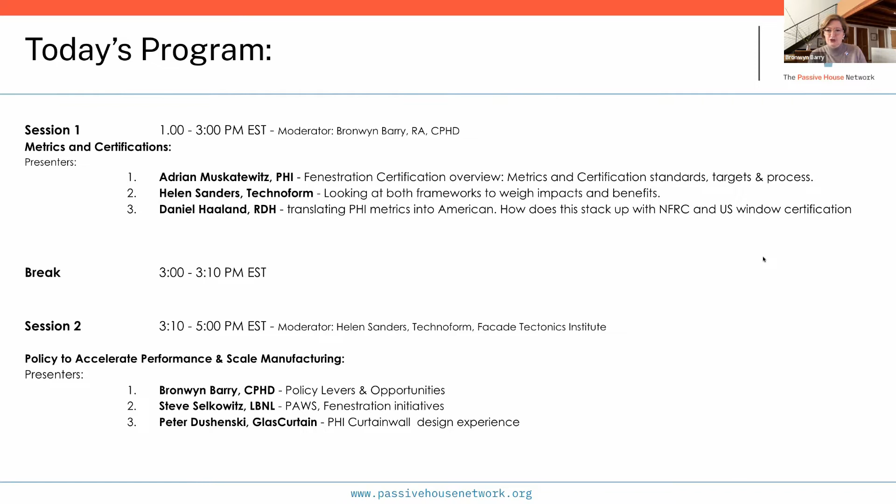And then the afternoon session will really dig into policies that can drive high performance fenestration production forward here in the US specifically, but in North America in general. So that's the schedule. The agenda really is a big and hairy question, not just helping to share what the metrics and the certification processes are for Passive House windows, but really the bigger question we're trying to ask here today is, how do we drive both production and demand? Because we know very clearly, and from hard-won personal experience, these two have to work in tandem.

And then secondly, really, what are the policies that we can help promote to move windows forward? Because we have seen this is a driver, it's an engine that we need to leverage a little bit better. And hopefully today we can help contribute to that discussion.

And just to establish some baseline terms, for those of you in the window industry, you will probably be familiar with a lot of these, but for those new to the discussion, I want to just establish a few metrics and terms so that you at least get a sense of what we're talking about when we convert to jargon, window fenestration jargon.

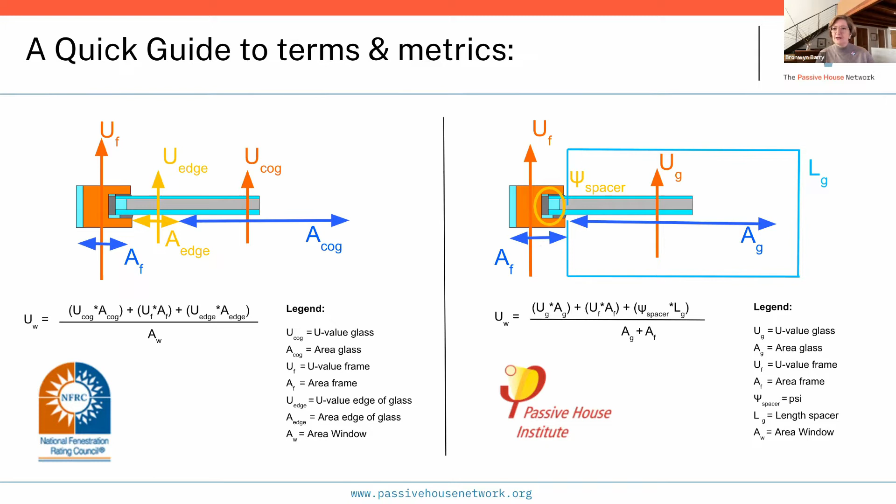And then on the right here for Passive House, things get shifted a little bit. And you'll see U frame, which is common to both. Psi spacer, this is where there's a little deviation from U edge, and U center of glass is the same. You then get area of frame and area of glass, and then there's an additional metric here, linear edge of glass. So just to show that and provide some basic terms there for you, we will share these as a PDF afterwards, and all of this is available on the recording.

And then to establish some metric conversions, we're working in different units, which adds another layer of complexity. The European protocol and the Passive House Institute works primarily in SI units, although they have been kind enough to translate the PHPP into IP units for the US market.

We here in North America primarily are still using the inch-pound units system. And just to get a baseline structure here, these are the same metrics. The blue ones are in BTU per hour square foot Fahrenheit. The red ones are in metric, watts per meter squared Kelvin. And so just to establish, so you have a rough frame of reference here for everybody.

And just to give you in the metric system, 1.2 is the equivalent of the warm and humid climate requirement for a window in Passive House, which is equivalent to a 0.21 in BTU hour square foot Fahrenheit, or R5. For those of us like myself, architects, we think in R values rather than U values.

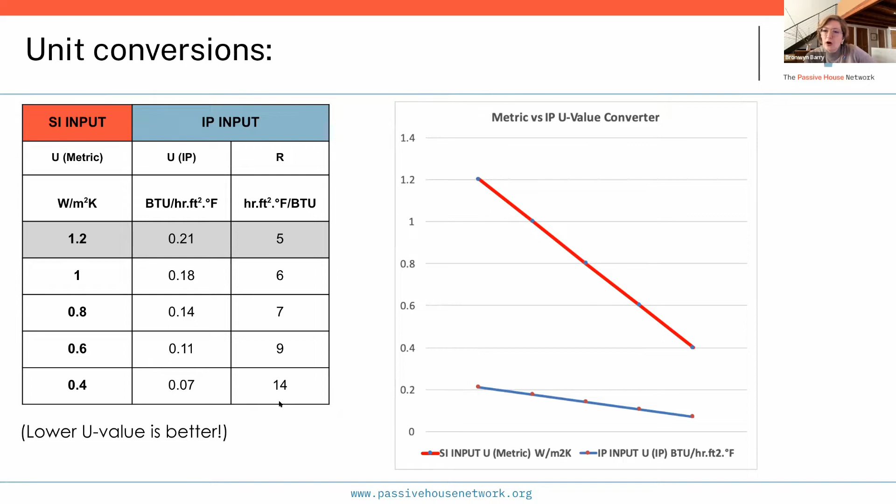And then at the other end of the scale, 0.4 watts per meter squared Kelvin, which is the Arctic climate requirement for a Passive House certified window. It is equivalent to 0.07 BTU hours per square foot, or R14. So just to set those metrics so everybody has a frame of reference, and we can do rough basic order of magnitude conversions.

So with that, I would like to begin by introducing you to our first presenter, Adrian Muskatewitz. Adrian joins us from Germany. His house, we're working remotely like everybody these days. Adrian is with the Passive House Institute and is their lead on fenestration and component certification. I've had the pleasure of working with Adrian for quite a while. We, in 2015, did a tour around the US. I dragged him to places all over, including Wisconsin, for the Wood Window and Door conference back in 2015.

And it's a pleasure for me to welcome him here today to share a little bit more about how the Passive House Institute certifies products and the processes and metrics. So Adrian, I'll hand that over to you now. Thank you. Yeah, thank you very much.

I'm really happy to be here today. I just would like to give you a quick overview of what we do in the Passive House Institute. What are the targets, and I would like to split my presentation into the past, the present, and the future.

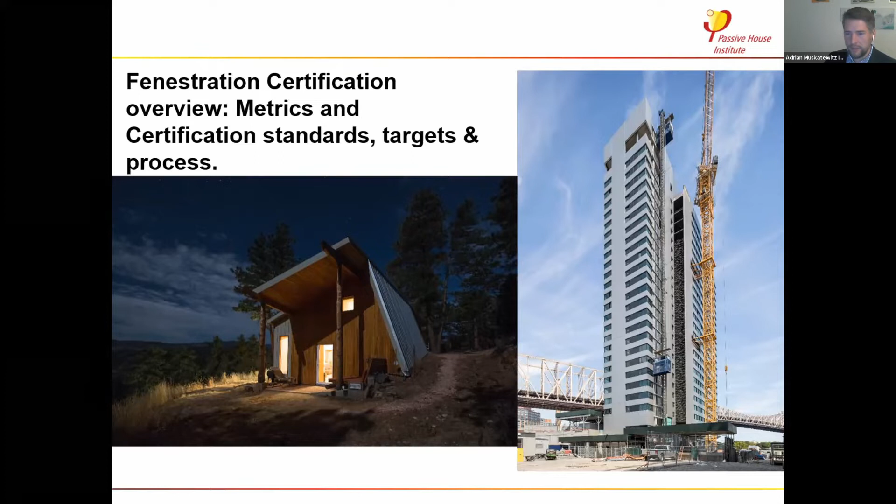So when the first Passive House was built in Darmstadt, when Wolfgang Feist planned it, there was no component available at that time, right? So there was no triple pane glass, there was no warm edge spacer, there was no insulated frame design. So they had to come up with an idea how to get to the levels they needed, also in terms of comfort, efficiency, and hygiene. So they had some custom-made prototypes, and they ended up getting quite good performance.

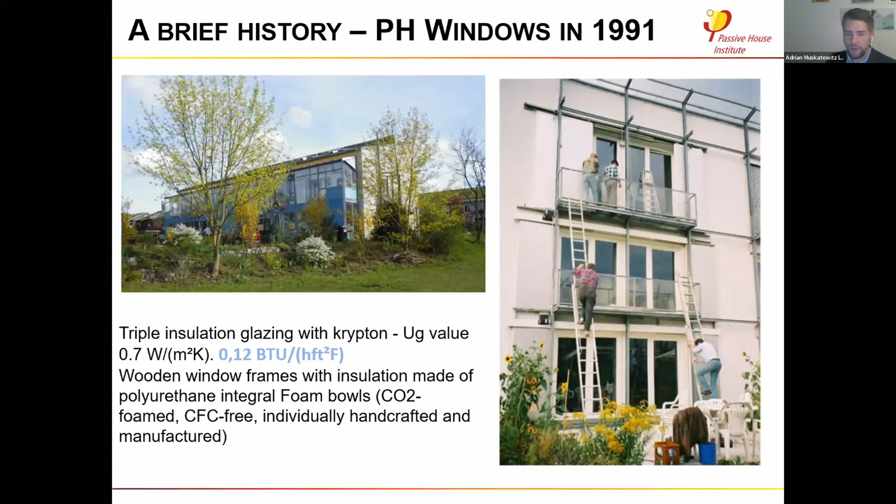They were actually buying some IV68 profiles, so solid timber frames, which were typical at that time in the beginning of the 90s. And they were covering them in insulation, made of carbon dioxide foamed polyurethane, and they got to quite a good level, which can be considered as a certifiable component nowadays. But you have to consider they still had to use aluminum spacers, so they had a kind of high thermal bridge for the glazing edge bond. So they were trying to mitigate that thermal bridge by having a very high glass inset.

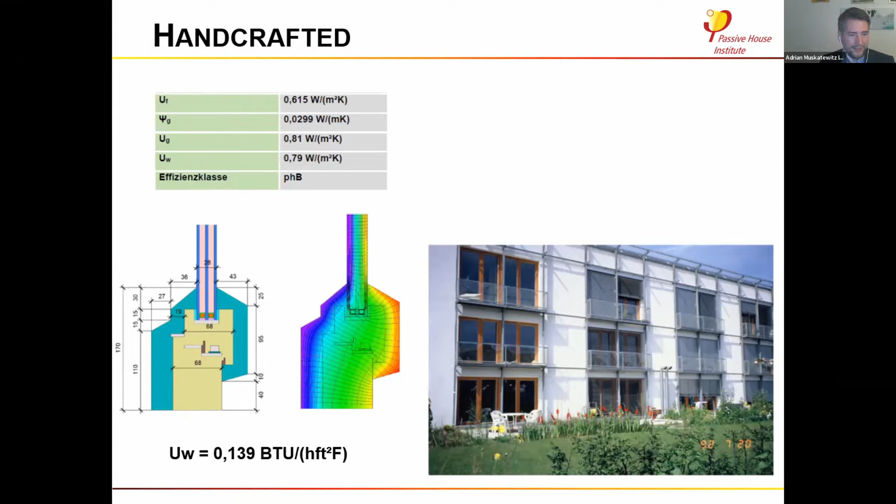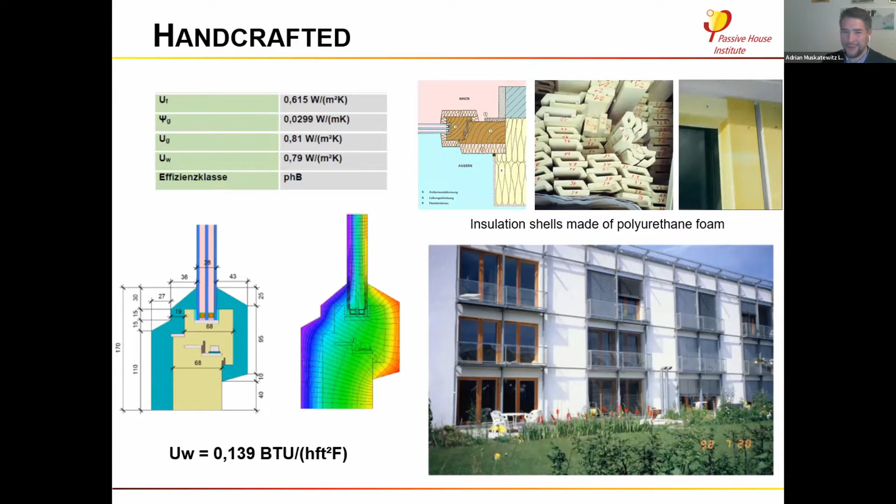And today it's still working, right? The house is still there. So those of you who have ever attended a Passive House conference might have had the chance to visit that place. And after 25 years, we were measuring the performance again. And even today, the average thermal properties remained close to the same level with one exception here, right? So there are no more excuses in not developing Passive House suitable components, right? Because they also made it 30 years ago.

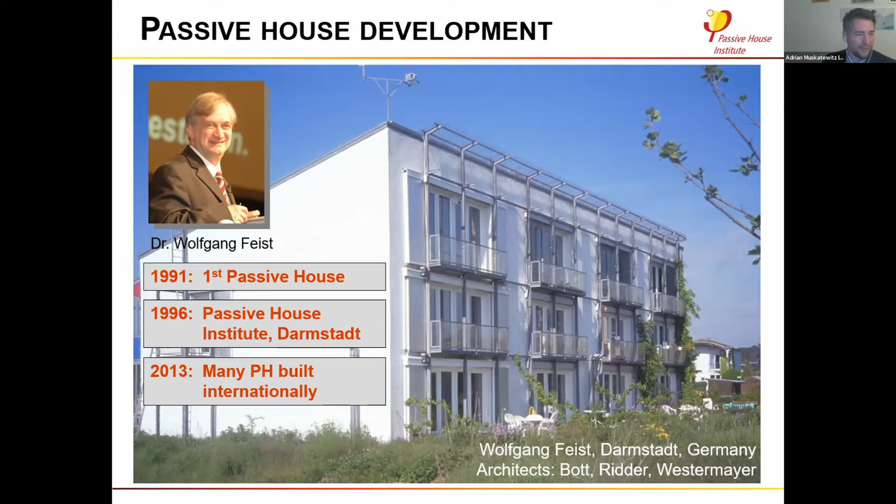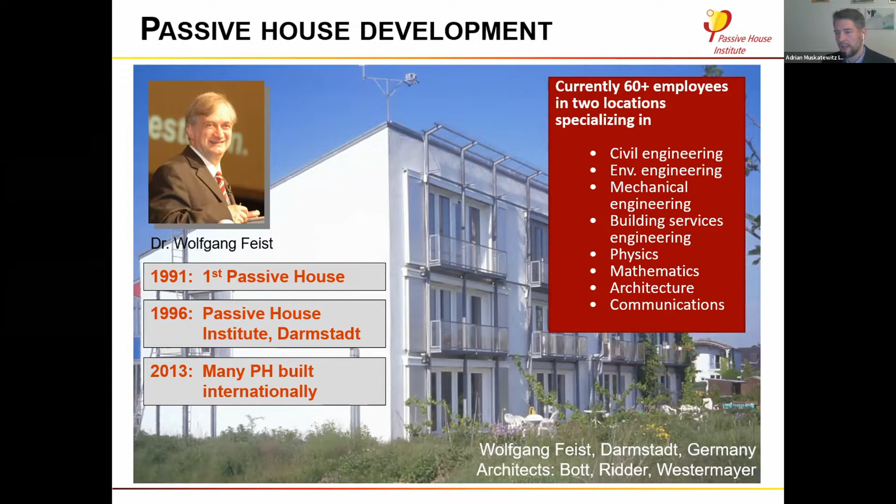So just a brief introduction, what is the Passive House Institute? So the very first Passive House you can see in the background. And Wolfgang, he was so convinced of the principles of that design that he developed the concept more and wanted to show that it works in practice. So he founded the Institute in 1996. So we got a bunch of passive houses built worldwide. We have currently 60+ employees at the Institute, specialized in different fields. You can see a quick overview here, and what we're talking about today is mainly the component certification and consultancy.

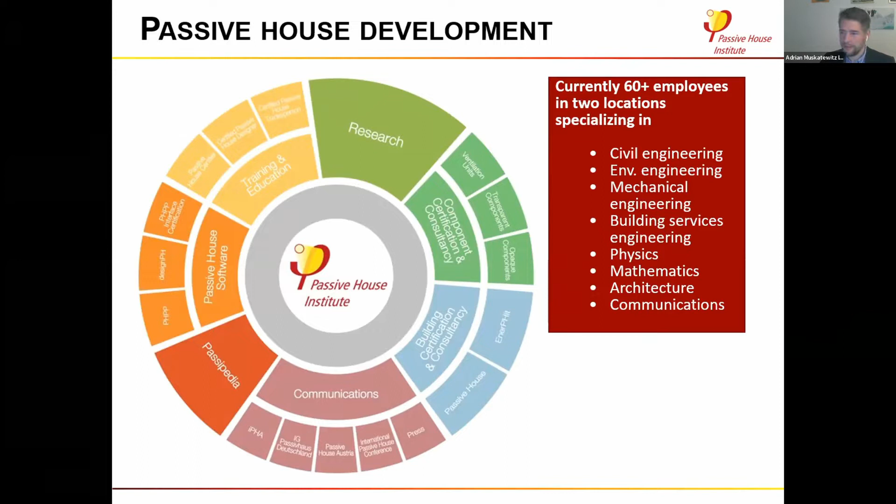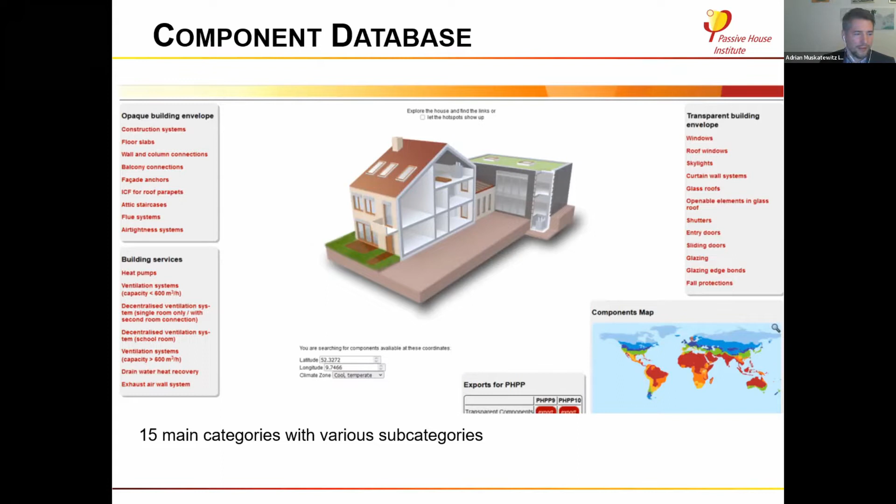And now I'm getting over to the present. So maybe some of you have seen that before. We have a component database you can find on our homepage, passivehouse.com. And we have basically 15 main categories with a lot of subcategories. Today we're talking about fenestration and transparent components, so I'm not going to highlight the HVAC, opaque components and domestic hot water. But just to give you a quick overview of what we've done within the last years.

So the whole component certification process started in the year 2000, and we had the first glass and window certified in the year 2005. And from then on, with the manufacturers together with the industry, with the Passive House planners, we introduced more and more categories, more and more design guidelines, and we're implementing more and more components, right? So this is just an excerpt for the transparent components, and we're trying to enhance that over time, and also to update and improve the criteria.

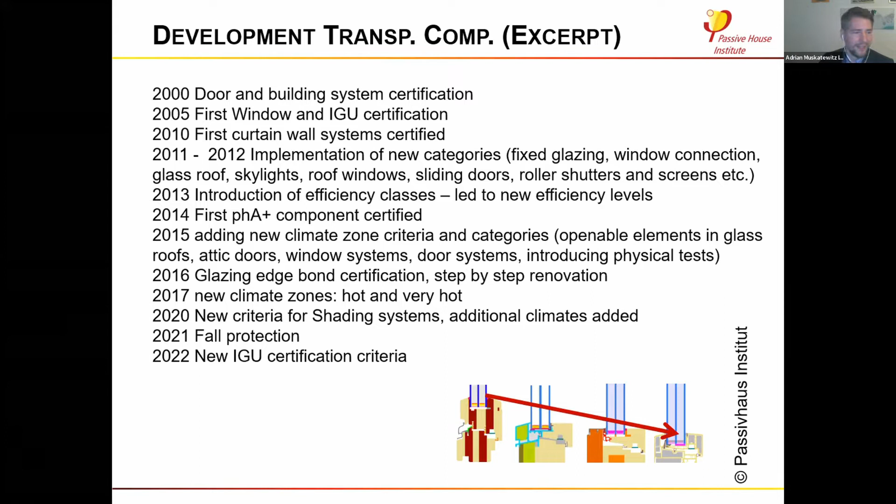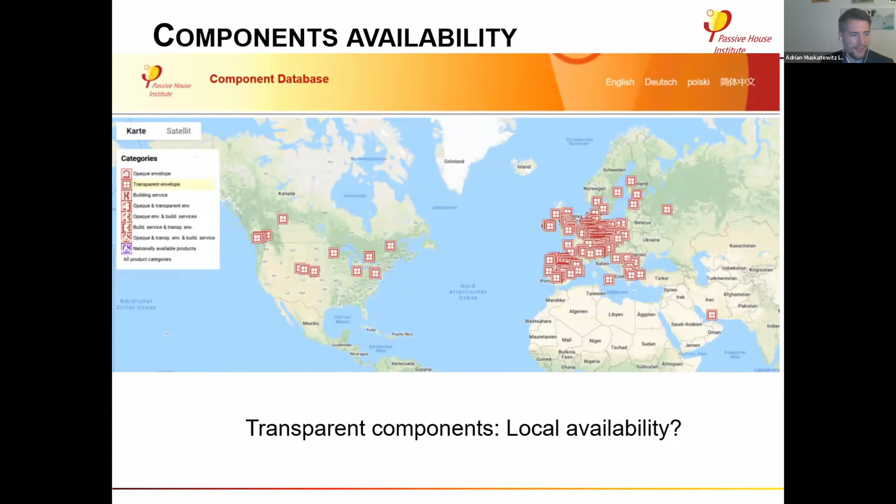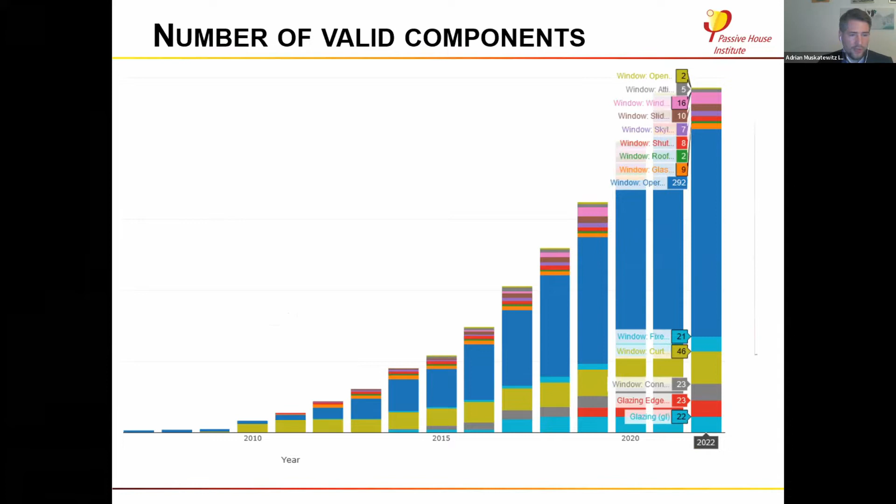So we have more than 1,000 valid certified components worldwide. And if we look at the transparent components, it's approximately 400 certified transparent components, where about 300 are windows. And I just would like to go quickly to the certification criteria. So this is just a brief introduction on a very rough level, just for you to know what we do.

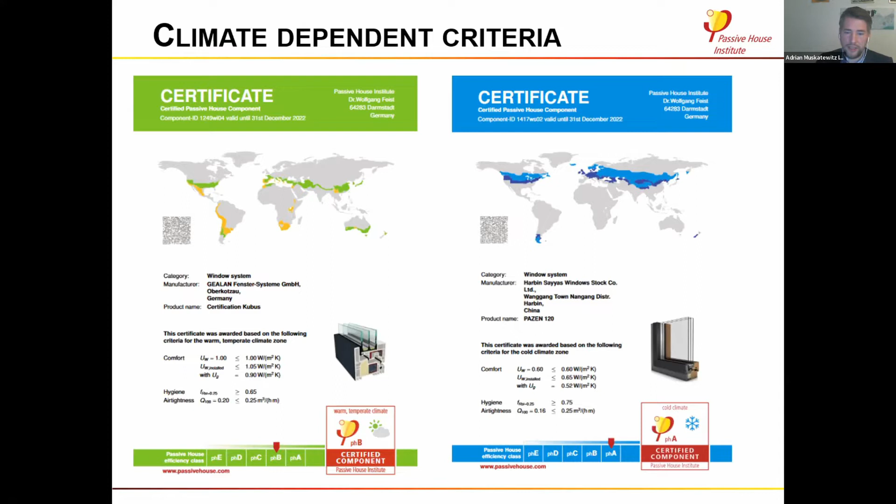So therefore, we have separate certification lines for the glazing, for the spacer, and for the window frames, right? So therefore, we have a predefined quality for the glass units whenever we certify a window frame, because we don't want a high performance glass to compensate a very poorly performing frame. So we would like to give the architects and planners a certain freedom. But mainly the simulations we do are based on the EN 10077. There's a mistake, it's 77, not 10,007, and the ISO 15099.

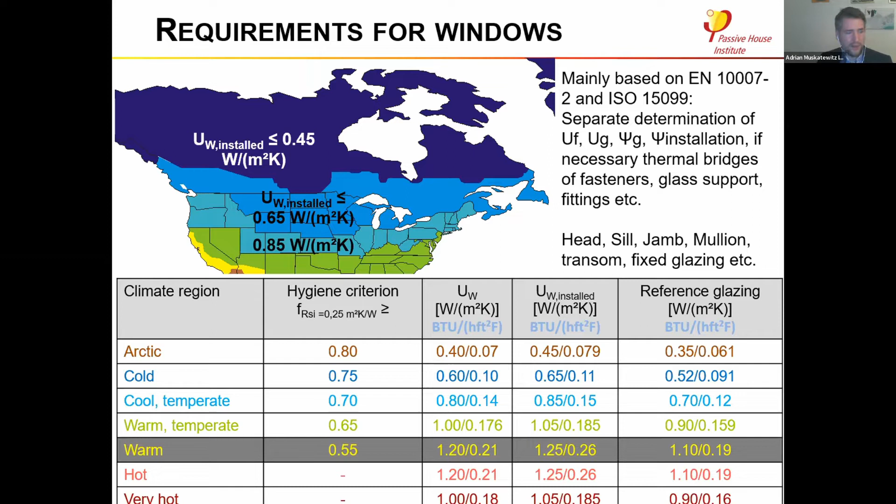Another criterion is always the comfort. So when we look at temperature asymmetry, when we look at cold downdrafts, when we look at vertical temperature gradients, we try to limit the maximum difference of operative temperatures. And by doing that, I don't want to dive very deep into that right now, but for certain climates, we can get different requirements. So the colder it gets, the lower the U value needs to be. But other criteria might lead to lower U values too.

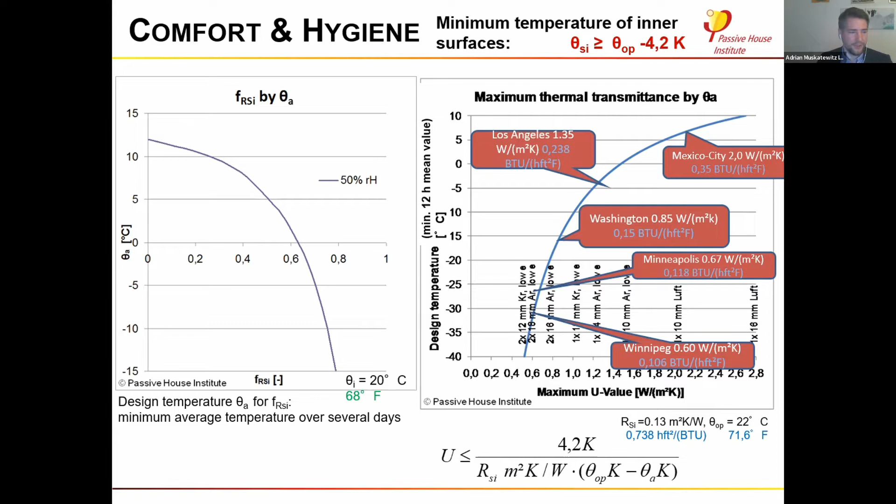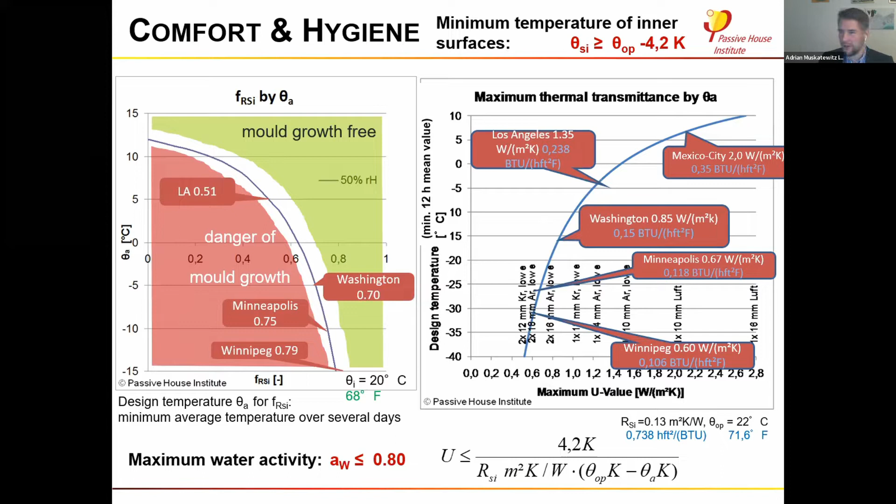That can be, for example, hygiene. So water, we need to limit the water activity on surfaces in order to prevent mold growth or condensate. And also efficiency and cost effectiveness might lead to different criteria, right? So it's always a mix of different things we look at when we look at the requirements, and we try to come out with a value that can represent that. Okay, don't want to spend too much time on that. You can read that on Passipedia or in the certification criteria if you're interested.

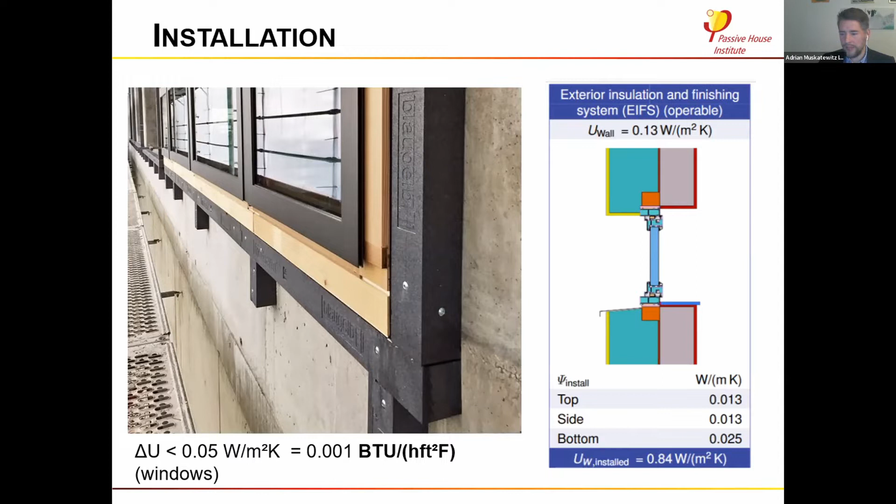So another thing that I mentioned is that, in contrast to the standards and codes, we consider the installation thermal bridges, right? So for all the components, they need to achieve the requirements for 3 wall assemblies, where the EIFS is mandatory. So you can see an example here. So for a window installation in front of a wall, you can see the corresponding values here. We're also looking in particular at the spacers and at the whole glazing edge bond.

So that is another topic where I think Helen is going to spend some words later on. So this is another thing where we slightly have differences, because we've been talking to the industry a lot within the last years, and especially for IGUs with higher thermal stress, for larger panes, it turned out that we need thicker secondary sealants than stated in the codes.

Okay, so the essentials, just to give you a quick summary of what we look at for windows. This is something which all windows have in common, no matter if these are vinyl windows, aluminum windows, or timber integral windows or whatever. They all have a low visible height. They have a high construction depth, which also gives us a high thermal resistance. We somehow try to mitigate the thermal bridge of the glazing edge bond, whether by having high performance components or increasing the glass inset.

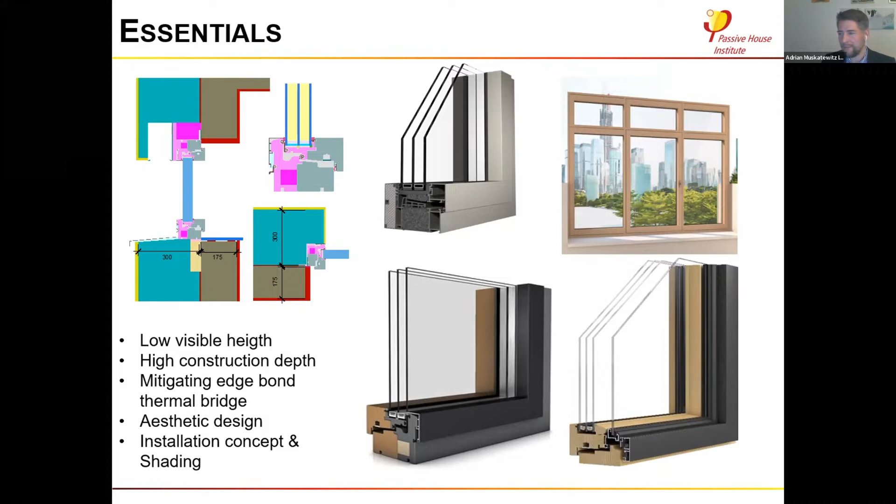So what we're looking at right now, and now just 2 more slides, would be what the future is all about, right? We are mainly looking at innovative concepts, concepts that are adaptable to various climates. So having different glass designs, maybe solar protective glazing, but actually the same frame structure. One example could be the first all-climate window concept from Hebei Orient Sundar.

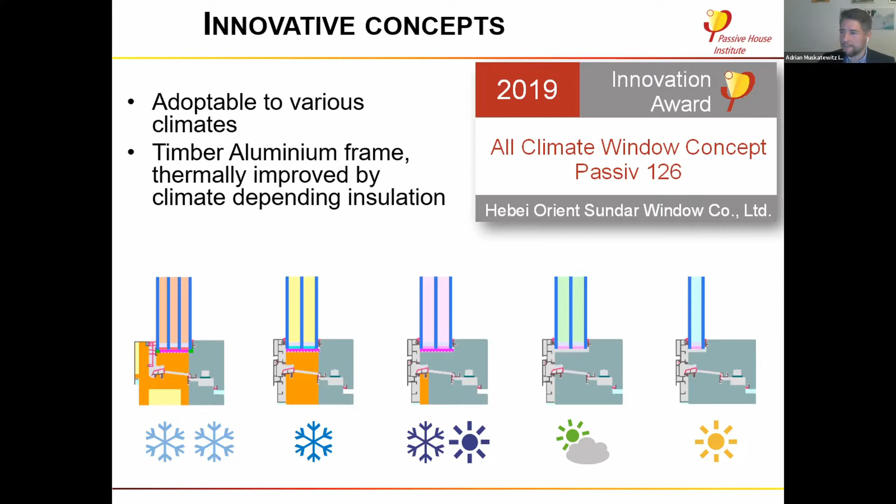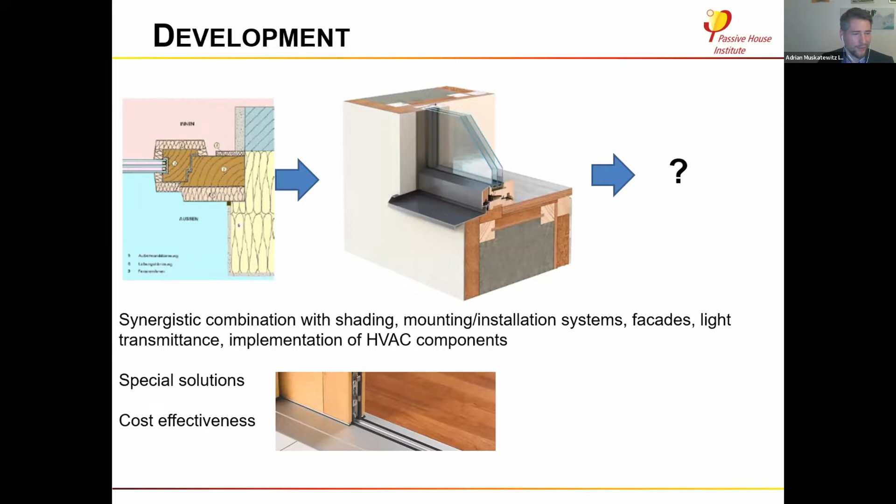Okay. Another important thing is the curtain wall design, because that became more tricky over the years. I mentioned that before. We have a very high thermal bridge of the glazing edge bond, because contrary to windows, we now have 6 or 8 millimeter secondary sealing thicknesses. We have very limited options to reduce the heat flow inside of a rebate. We need to consider the fasteners, glass support, everything else, installation and airtightness concept. And what we would like to see would be the first manufacturers that also include the shading system concepts, right? So this is what we're looking for.

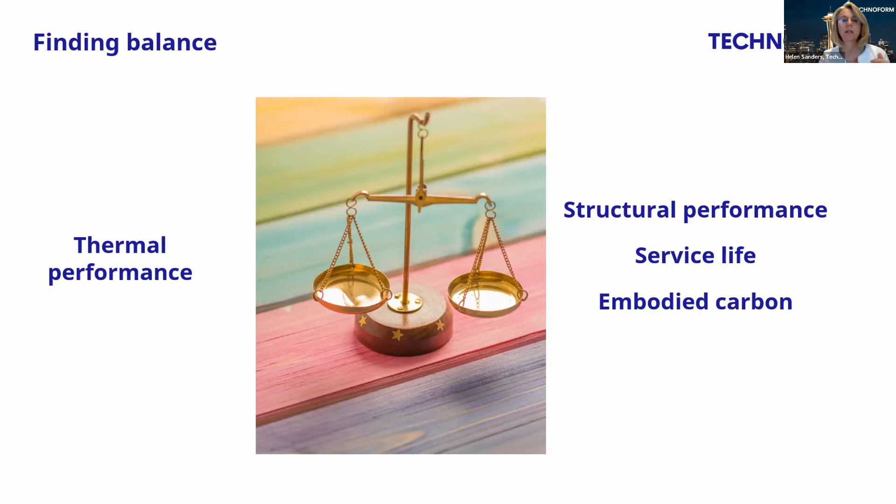And also the type of sealant makes a difference to the structural performance, and the choice of sealant is different in, say, curtain wall and high structural requirements for regular fenestration than it is for, say, residential fenestration. So we need to consider both the thermal performance and choices in thermal performance, the impact that they have on the service life of the insulating glass unit.

But you can end up with shorter service lifetimes if you don't have a design that is application specific. So you use, say, a residential style unit in a commercial application. You have low quality or less material, like Adrian just talked about. You don't use enough secondary sealant, or use the incorrect spacer for the application. If you're not designing your insulating glass units to take into consideration the climate zones that it's going to experience, if you have poor workmanship, of course, and of course, poor installation. So I'm going to talk about material choice and design and application specific edge bonds.

So before we start that, just a quick look at the geometry of a typical edge bond in insulating glass. This is what we call a typical dual seal system. Dual seal meaning there are two seals. One primary seal, which as you see here is PIB or polyisobutylene. It's chewing gum basically, but don't eat it because it's not food grade. You have a spacer. In this case, I'm showing a box spacer. Typically, you fill that with desiccant. That's to take up any moisture that comes into the unit during its lifetime. And when that desiccant's used up, basically you start to get condensation and your unit fails. So the desiccant is also very important to the service life.

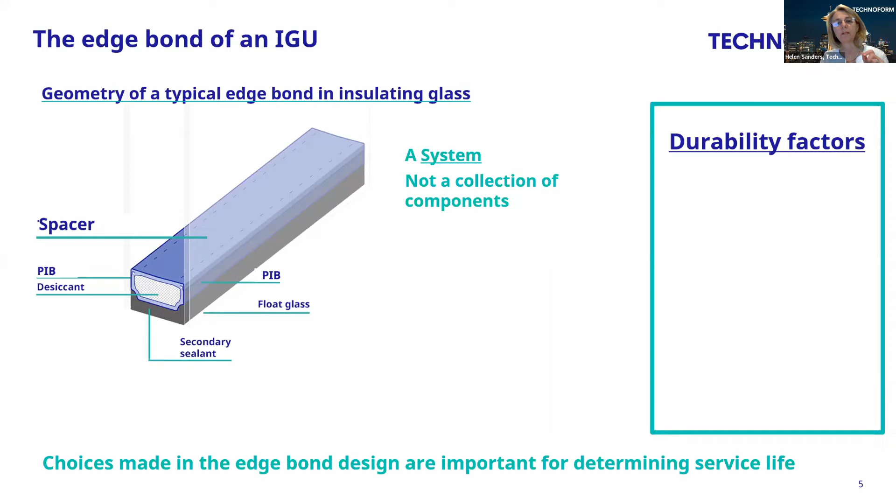And there are some key durability factors. The material choice, and that is the sealant, that's the spacer, the amount of desiccant you use. Critically, the sealant path length and contact width that you have to the glass, the number of penetrations or how you seal those penetrations in that primary seal. And then, as I mentioned before, the ability or the importance to design for climate loads.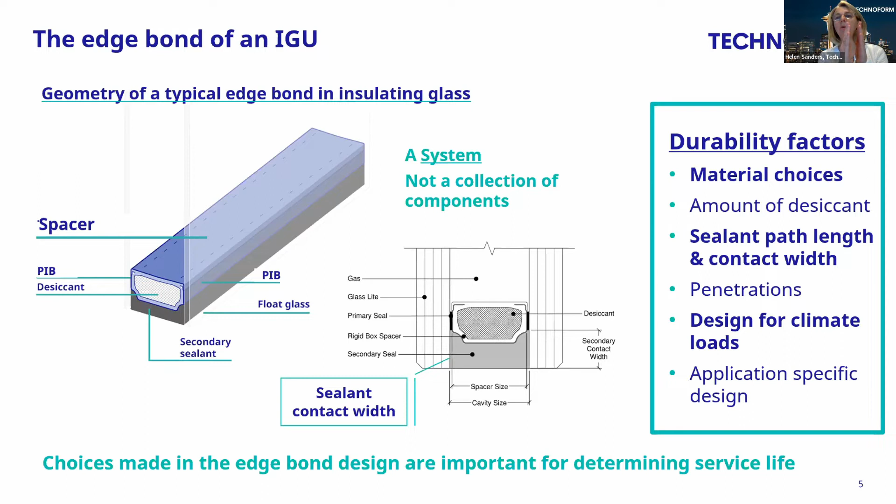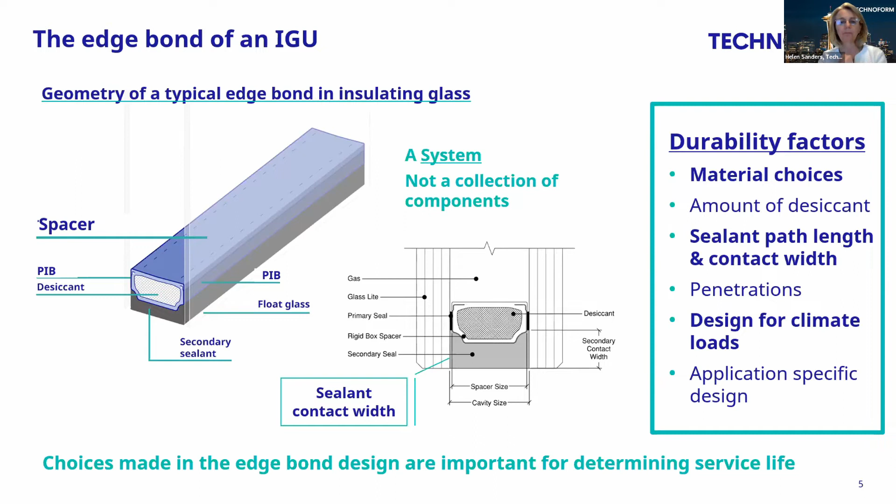If you imagine you have a sealed insulating glass unit so that you've got a cavity filled with gas and it's sealed. So when it gets hot during the summer or the height of the summer's day, the pressure in that cavity will go up, and that will put a stress on the insulating glass unit. The bigger the unit, the more flexible the glass is, and the more likely the glass will bow out to take up that pressure. But smaller, stiffer units or multi-cavity units, triple panes, for example, they are more stiff, and that pressure is typically taken up by the extension of the edge seal, which can increase the moisture vapor transmission or the gas loss. And so smaller, stiffer units, we have to be very careful to make sure that the edge seal design is appropriate to the stress it's going to see. So devil's in the details of the edge seal.

So let's take a look at the North American commercial fenestration, typical construction. In contrast to Europe, where I would say, with the exception of structural glazing, curtain wall applications, the majority of commercial insulating glass uses a polysulfide or a polyurethane secondary seal. The majority of all commercial insulating glass has a silicone secondary seal in North America. So that's a big difference between North America and Europe. And that has driven different spacer usage in North America and Europe.

So typically, commercial glazing in the US has a silicone secondary seal. And the reason for that is because it has excellent structural performance. It has very high UV resistance. It has great water resistance. So if you put it in a badly wept frame, it will do better than a polyurethane or a polysulfide system, for example. It has high temperature performance, so great for North American applications. But on the downside, it's actually a very bad vapor barrier.

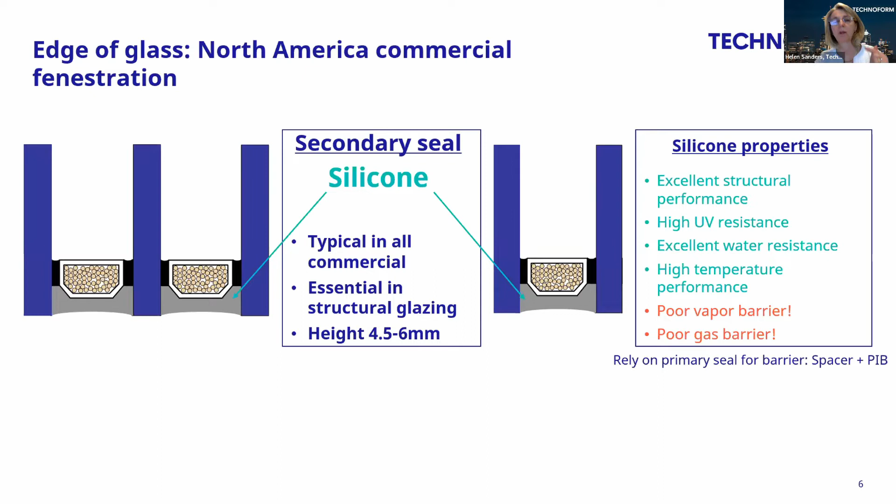So if you think about your shower, silicone is great for resisting liquid water, but it breathes. It allows moisture vapor through. It also lets argon through. So what that means is that when you have silicone as a secondary seal, you rely on that primary seal, the PIB and the spacer, to be the only moisture vapor and gas barrier. So that's what you have to rely on. And for this reason, when you have silicone secondary seal, the spacer that you use should have a solid metal vapor and gas barrier in its construction.

So that means aluminum box spacer, which is not great for passive house because it's not warm edge. Stainless steel box spacer, really basic warm edge. Or a plastic hybrid stainless steel, which basically replaces a lot of the metal with plastic, and it has plastic bridging the top of the spacer, but it has very thin stainless steel around the sides and the back, which gives you a very, very good moisture vapor barrier. So that's why in North American IG construction, you end up with these kind of spacer systems because of the ubiquity of silicone as the secondary seal.

And you can't really change that out in structural glazing because that's a requirement. You have to have silicone in structural glazing. And typically the height of the silicone, minimum 4.5, typically it's more like 6 millimeters or 1/4 of an inch on the back of that spacer.

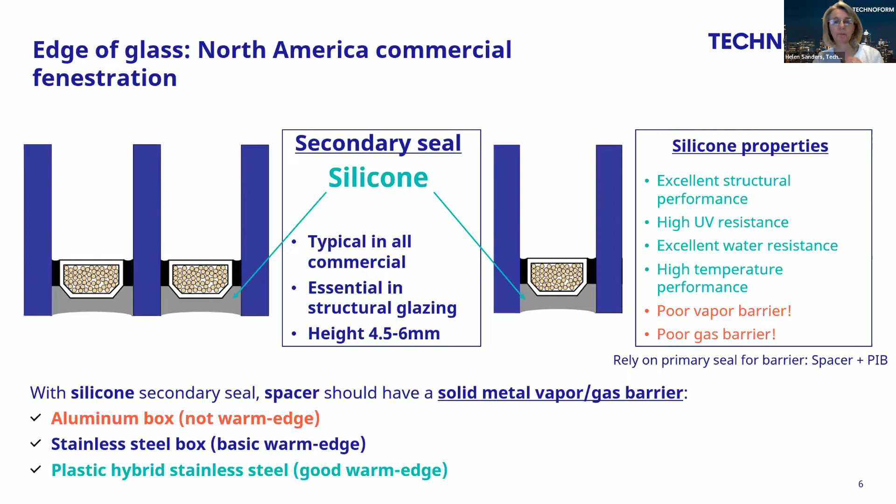So before I go on to thermal performance, I just want to take a little trip into triple pane because it's ubiquitous in passive house applications, as you could see from the numbers that Bronwyn and Daniel were talking about. You basically need a triple pane in most climate zones. The challenge with going from a double pane to a triple pane are really twofold. From a design perspective, as I mentioned before, because you've doubled the cavity dimension, you end up with increasing the edge seal stress for a given climate condition. So for a given high temperature or wind load, you're going to have a much higher edge seal stress on a triple pane than a double pane, everything else being equal.

It requires you do an analysis and adjust the edge bond design for smaller windows, because those are the ones that are stiffer and more likely to have the pressure taken up by the edge seal. Also, it's harder to ensure good workmanship, because as you can see from this diagram, 2 of the 4 seals are now not inspectable. So you have to make sure that you have very good process control and repeatability. So there's a question here, and there's really no data in the marketplace at this point: should we expect a shorter service life? And that, I think, we have to think about and focus on process control and design, edge bond design for, as I say, small stiff units to ensure against that.

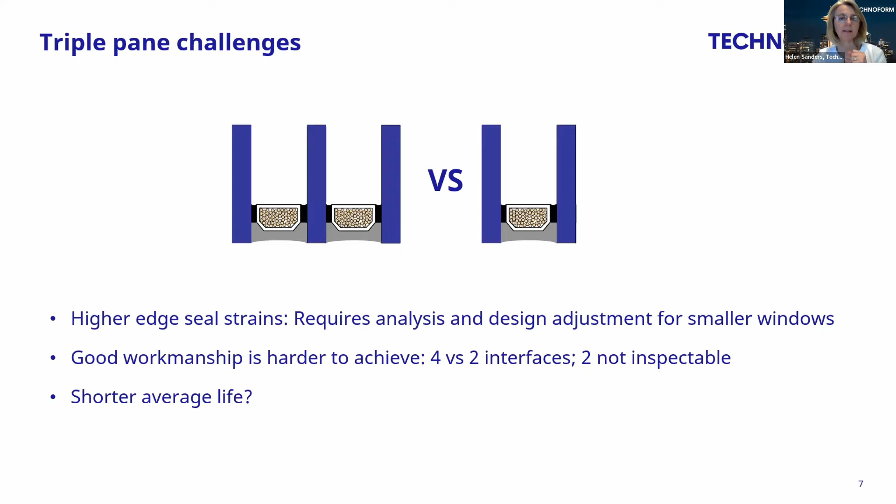So let's talk a little bit about thermal performance. And what I want to do is compare North American with Europe. Bronwyn and Daniel did a little bit of this, but I want to be really sure that everyone is aware that the U factor that we calculate in North America through the NFRC 100 standard is different to the ISO 10077 that Daniel mentioned. Apparently physics is different across the Atlantic, but joking aside, there are different assumptions used in those calculation methods. So even if you translate BTU units, IP units into SI units, and you use the 2 different approaches, the same window will have a different U factor value depending on the approach.

So we have to be very careful about not taking a European or passive house U factor requirement in SI units and turning it to BTUs, and then comparing it to an NFRC rated window. You can't do that because the calculation method is different. So that's one of the things to bear in mind.

The other thing is, as Bronwyn mentioned, in North America, we really only rate the assembly, whereas in Europe and the passive house standard, which is based on the European methodology, U factors of the frame, the edge, and the center of glass are considered independently of each other. And frame manufacturers, for example, can give you a U factor of the frame because that's how they're measured. Whereas in the US, nobody gives you a frame U factor because it's not required, because in North America, we just care about the assembly.

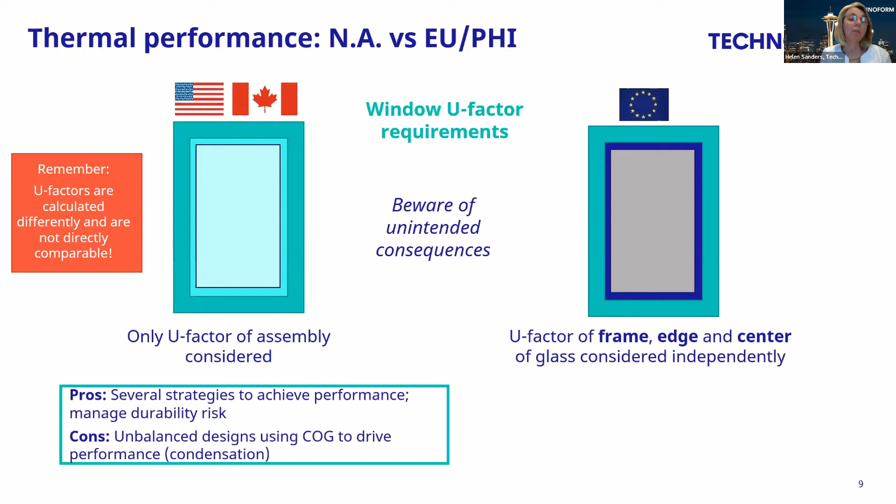So there are some pros and cons of each of these systems, which I'm going to point out. We just need to be aware of some unintended consequences. On the pro side for the North American approach, it allows for several strategies to achieve the overall performance, and it allows you to manage durability risk in the insulating glass unit. So you can improve the center of glass and not do so much at the frame, or vice versa. The downside is that it can create unbalanced designs where the center of glass is used a lot to drive the overall performance, and you end up having not so great edge of glass and frame, and you end up having condensation issues. So that's one of the downsides of the North American approach.

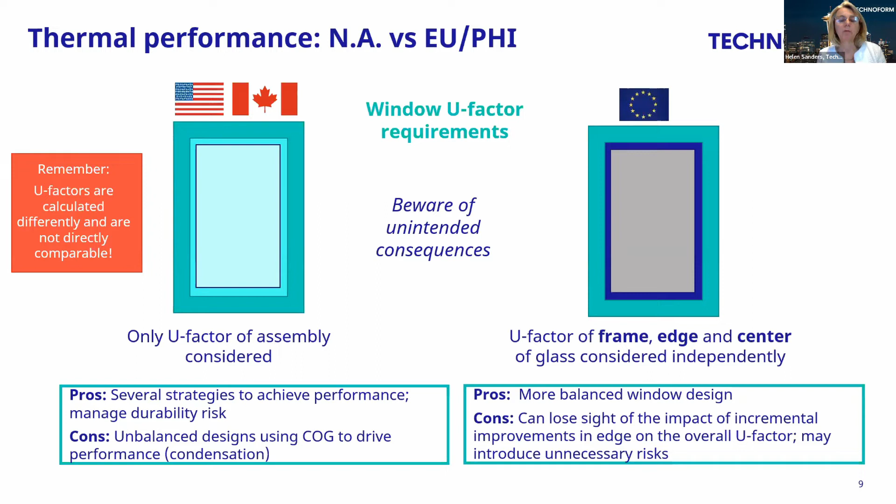Now if we look at the European approach, you end up with a much more balanced window design, because you're taking care of the frame thermal performance, the edge of glass, and the center simultaneously. On the downside though, because you are looking at these independently, you can lose sight of the impact of incremental improvements on, say, the edge of glass, which is the smallest factor in the overall U factor. You could end up saying, okay, I've got a 10% improvement in my edge of glass. Oh, that's great. But I may have done some things like reduce sealant or change the spacer that may have a long-term impact on service life. But when we look at the overall U factor of the fenestration, it hardly moves the needle. So just need to be careful of not just looking at the detail, but taking a step back and looking at the overall performance, to make sure that we're having an appropriate balance between thermal performance and service life.

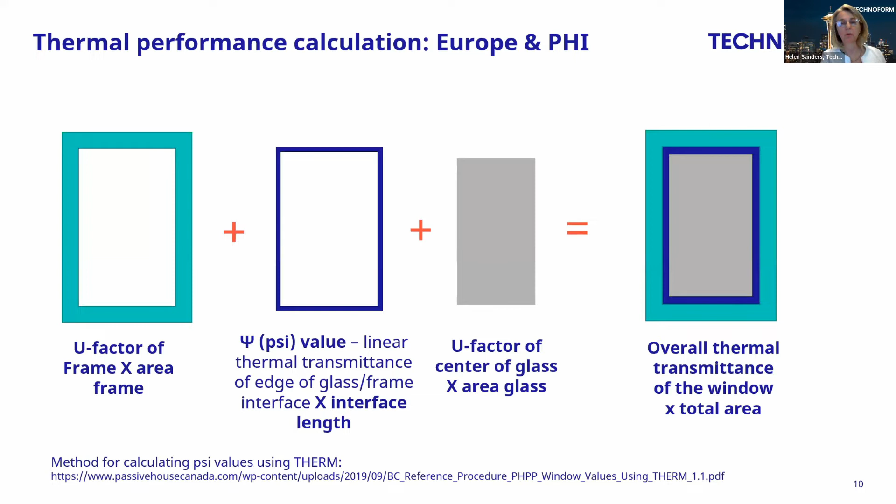And just a quick refresh on what Bronwyn told us. The thermal performance calculation in Europe is the U factor of the frame times its area, plus the psi value, which is the linear thermal transmittance of the edge of glass and frame interface, multiplied by the interface length, added to the U factor of the center of glass multiplied by its area. That's how we do it in Europe. And the next speaker is going to talk about how you do that calculation using the North American tools that we have. But what I want to do here is take a dive into the psi values, because that is something that we're not used to hearing about in North America.

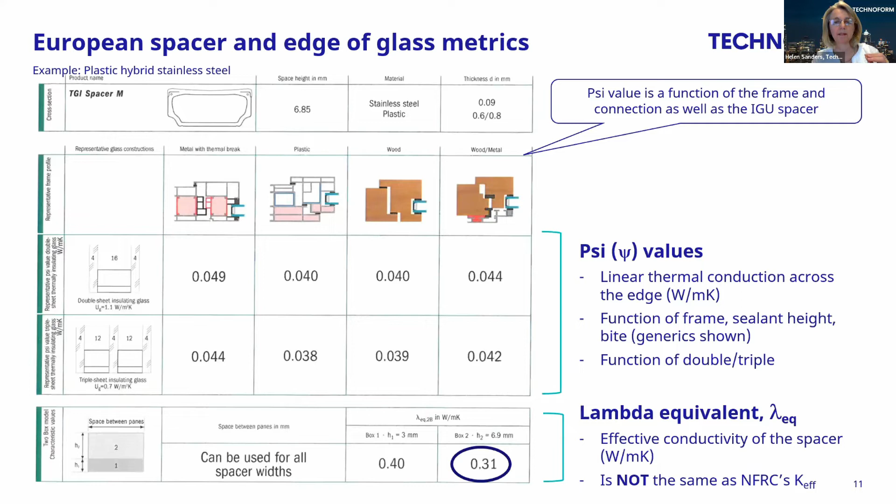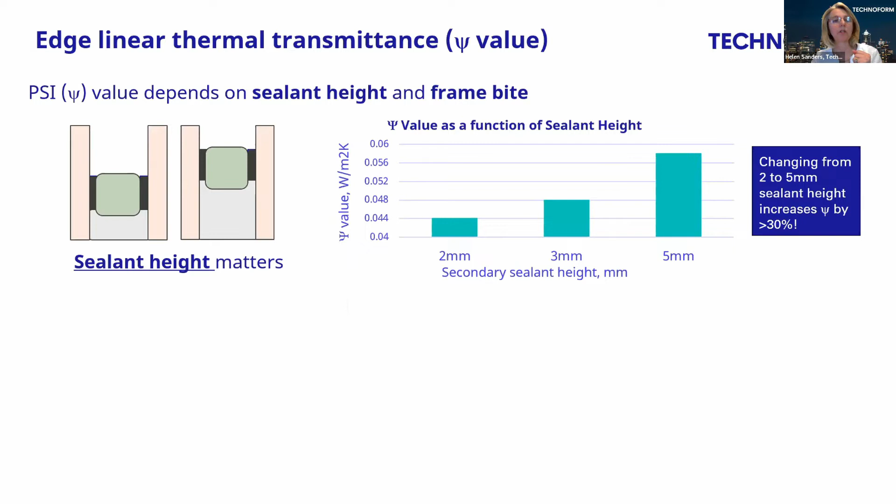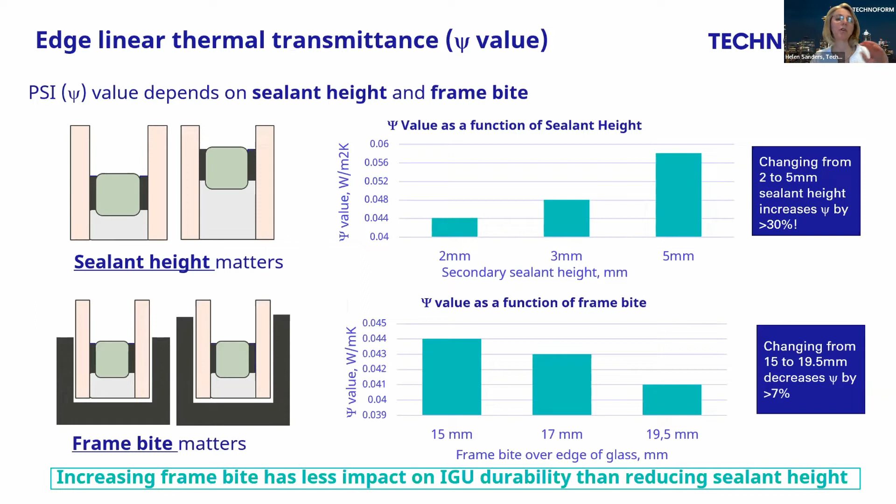So just quickly here, some data. Sealant height matters. This shows you how the psi value can change with the amount of sealant. Frame bite matters. If you bury the edge further into the frame, you get a better psi value. And we'll note here that increasing a frame bite has much less impact on IG durability than reducing the sealant height.

How much difference does it make on the U factor in your choice of warm edge spacer? So I'm going to give you an example here. This is using a US manufacturer's very high performance frame, very similar to European high performance windows. In this case, I'm just using a dual pane as an example with an appropriate

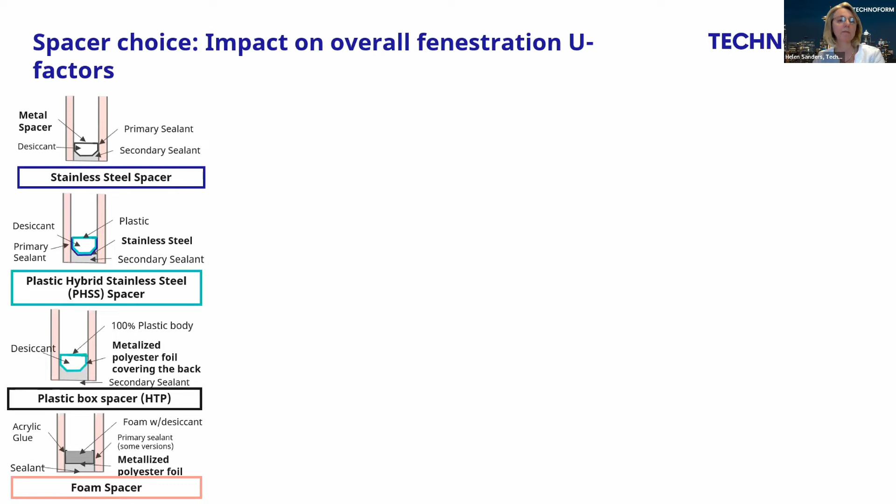sealant depth. I'm using 4 different spacers to compare: a stainless steel box spacer, a plastic hybrid stainless steel spacer that, as I mentioned, is plastic, but it has stainless steel around the sides and back, a full plastic box spacer that has a metallized foil around the back, not a metal, and then a foam spacer that also has a metallized foil as a vapor barrier. Now, these are the examples, and this is the results.

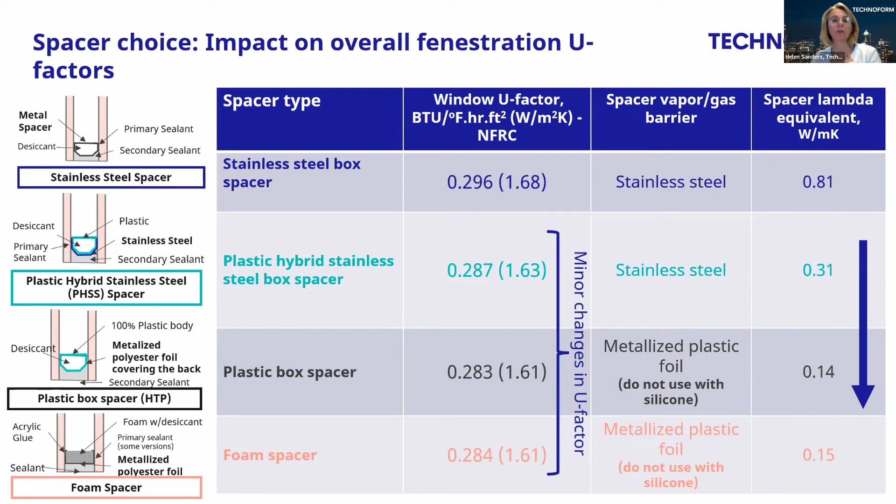This is the window U factor, NFRC U factor, in the IP and SI units. I've identified the vapor barrier. As you remember, solid metal is what you use with silicone. And this is the spacer lambda equivalent, which is like their effective conductivity. You see, effective conductivity goes down, but what you notice is there are quite minor changes in window U factor. And I'm giving them out to 3 significant figures. Normally, you'd only quote them to 2, so it's really in the rounding.

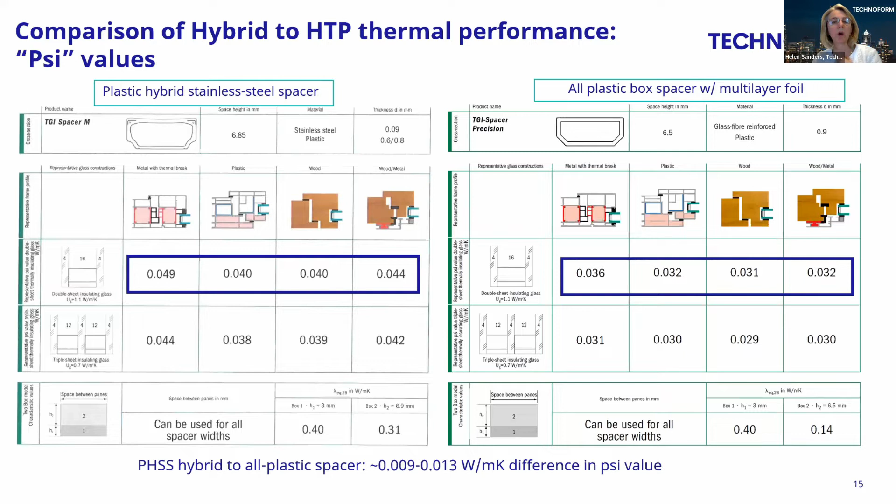Here's just an example of a plastic hybrid stainless steel spacer versus an all plastic box spacer. The difference in the psi values across different window types is somewhere between 0.009 and 0.013. If we translate that to the effect on a whole window U factor, we're looking at about 0.05 in SI units, which is around the rounding error, maybe a point. It has less impact as you make your window larger, and it has more impact if you go to better frames.

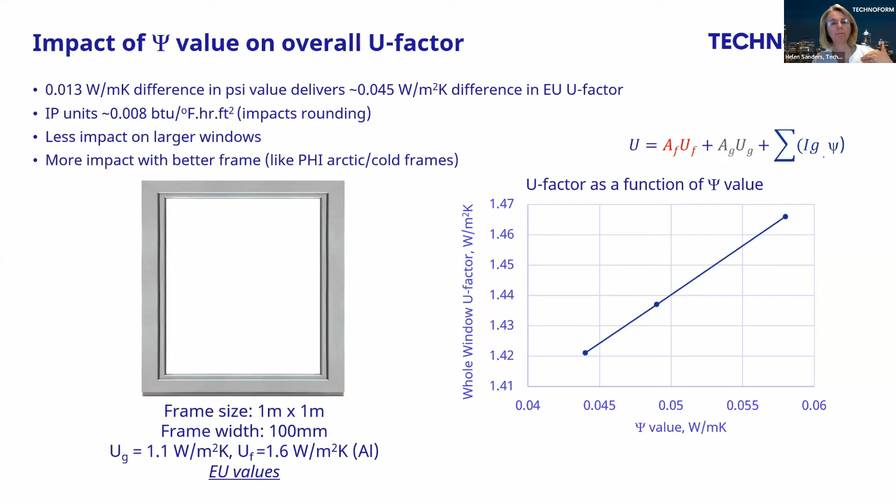So just quickly on Passive House considerations, Daniel just talked about this. If you go to the Arctic category for the Passive House certified spacer products, you will find that they're all 100% non-metal. They all have plastic metallized foils as a vapor barrier. They're typically qualified to European seal standards with polysulfide and polyurethane, not silicone. And they're typically used for residential windows, not aluminum commercial systems. So in order to get to these levels of performance, you have to take the metal out, which when you use silicone is typically not a good thing to do.

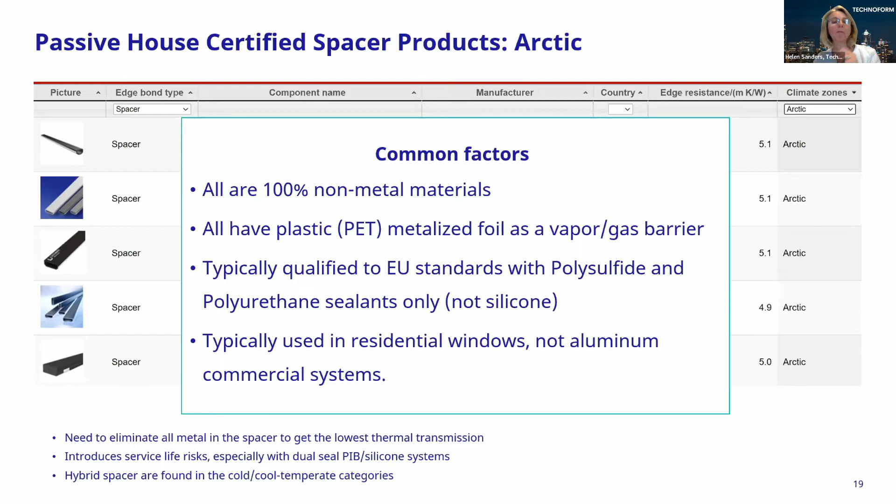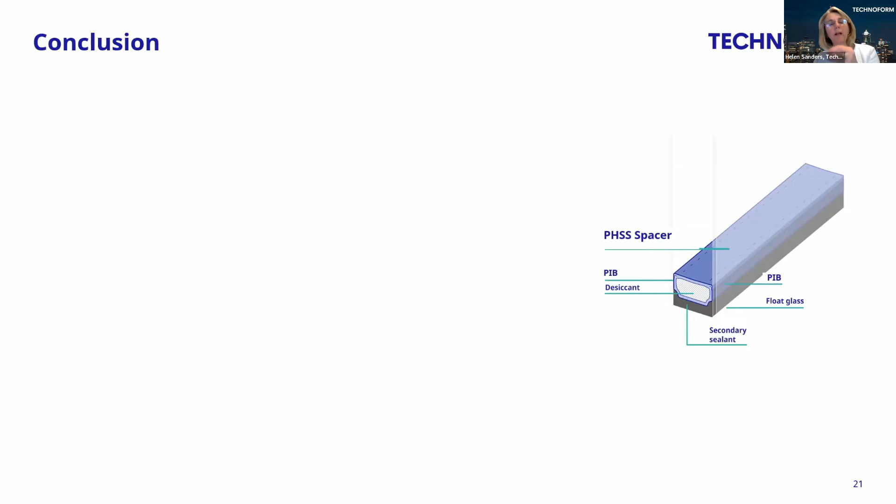So really, the best combination is the plastic hybrid stainless steel, because it has low conductivity, but it also has good durability with silicone. So, conclusion: Passive House certified spacers are really not guaranteed drop-ins into North American edge bond. You remember that silicone issue. Vapor barrier is key to durability. A hybrid spacer is a good combination of durability and thermal performance.

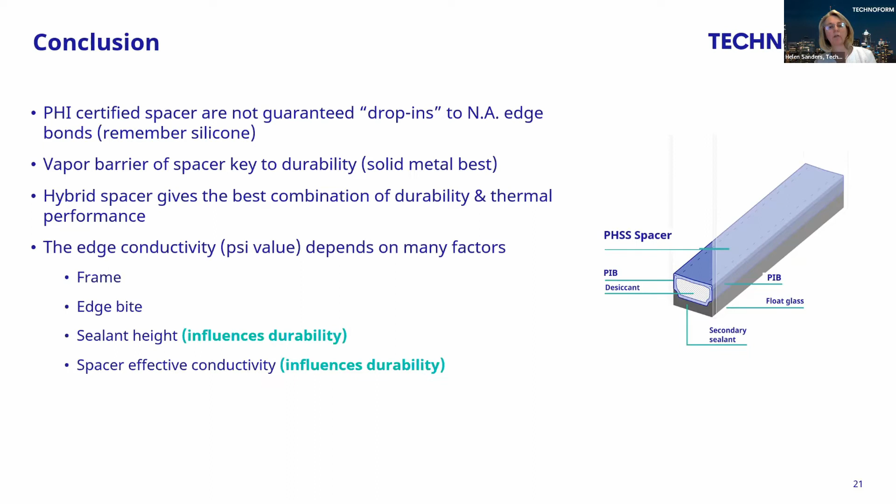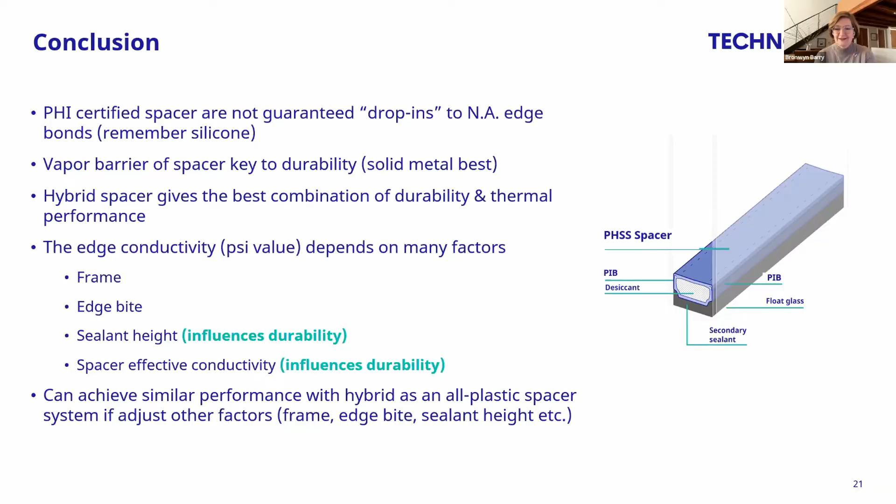Wonderful. Thank you, Helen. And always interesting to go deep into the weeds, and a very edgy presentation. So next up will be Daniel Haaland. Daniel joins us from north of the border up in Canada. Daniel works at RDH Building Science and is their technical lead on thermal simulation.

I'm really excited to hear Daniel's presentation, because I think Daniel will be presenting a bit of a bridge protocol, a research report and protocol that he has developed in conjunction with Peel Passive House. And it's a really interesting process that I'm excited about, and I'm looking forward to hearing a little bit more from Daniel about that. So Daniel, go ahead.

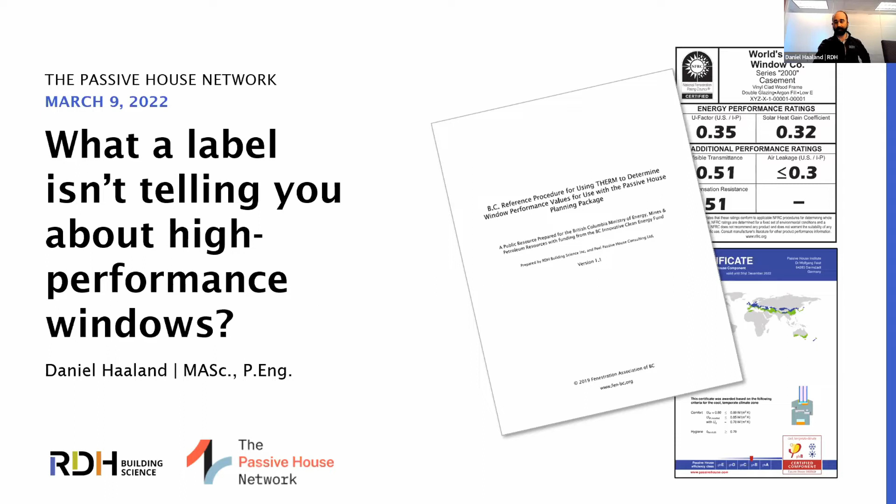Let's dig in. Thank you for the introduction there, Bronwyn. And yes, today my goal with the talk is really to highlight what a label isn't telling you. And part of this is, as Bronwyn mentioned, a procedure that was developed to help bridge that gap that Adrian and Helen mentioned, that there are differences between the way that we model our window products and window systems, more appropriately, to the Passive House Energy Modeling Standard and for labeling purposes in North America. So there are differences. The good news is there is a procedure to bridge that gap, and we'll talk about that today.

All right, it's a short talk, so it's kind of weird to have learning objectives, but nevertheless, at a high level, what we're hoping to do here is to really understand how the Passive House standards and their approach to windows has driven performance and development of high performance window systems. I'll say that it's not an accident that there's this pervasive perception that Passive House windows are high performing thermally. It's not an accident, and we'll look at a few reasons why.

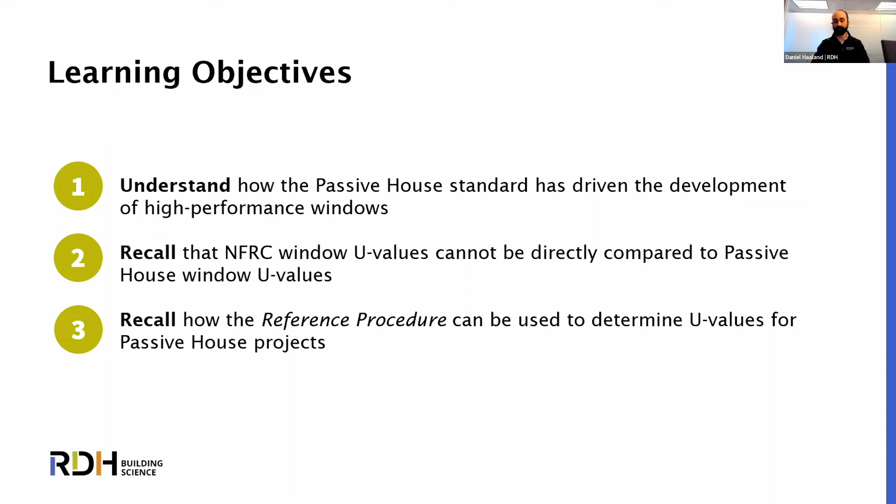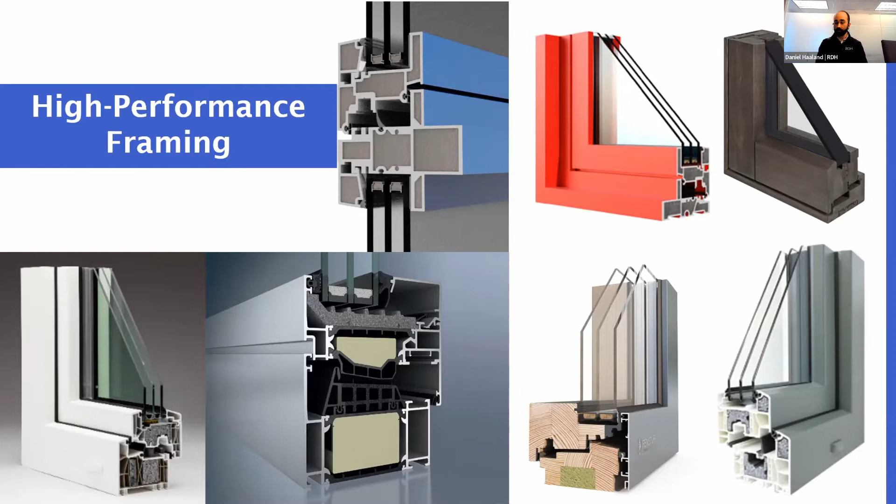So what makes a window high performance? There are some things that North American manufacturers get. It's high performance framing, whether it's low conductivity frame materials like vinyl and fiberglass, or highly insulated frames, or frames with large thermal breaks, or wood, etc. So we kind of understand that aspect of it. It's high performance glazing and spacers. It's that ubiquitous triple glazed window on a Passive House project. It's high performance spacers that Helen went to quite a bit of detail on.

But windows don't float in space. And this is one of the major differences between the North American approach to looking at windows versus what Passive House has forced manufacturers and teams to look at in Europe. So one of the differences here is, windows are designed for installation. Windows do go in a wall, or presumably they would.

And what that means is that when you're looking at the pieces of your frame, you might start to wonder, do I need this aesthetic component on the outside of my frame, or are we actually going to flash all over that? So I actually don't need those pieces. How am I going to flash? I'll say, I'm a building enclosure engineer first, so I really worry about water. Every day, all day long. And so we do need to make sure that we don't have leaks into our buildings, and having window systems which are designed to accommodate that in a way that doesn't increase heat loss around the perimeter is incredibly important.

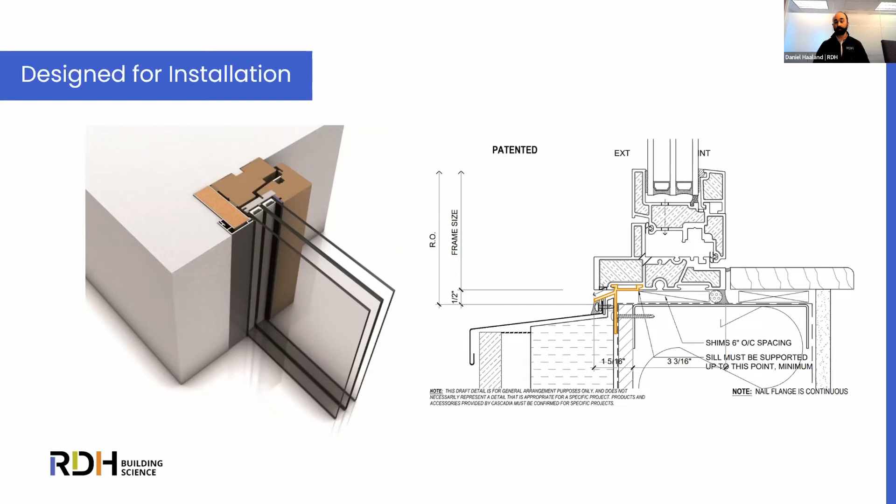Now, if the focus of today's talk was looking at numbers, that would make me extremely happy, but perhaps thankfully I haven't included those. But in terms of the scale of magnitude of this particular problem, if you do not install your window properly, you can take the performance of your window from about a triple glazed performance down to a double glazed performance value. So it's a really meaningful problem that some manufacturers out there are actually trying to solve. We design our windows for shading. Windows are unique in that they not only separate inside from outside, but they also allow for some passive solar heat gains. And knowing when we need those, when we don't need them, and making sure that we have that control is critical.

And perhaps somewhat obviously, they're designed for view. Passive House projects don't just have little porthole windows. They have windows where they need them, or where they're desired, and they're big, or they can be small, and they can be targeted for areas where people actually are going to go and look out of the window as opposed to being located at your feet.

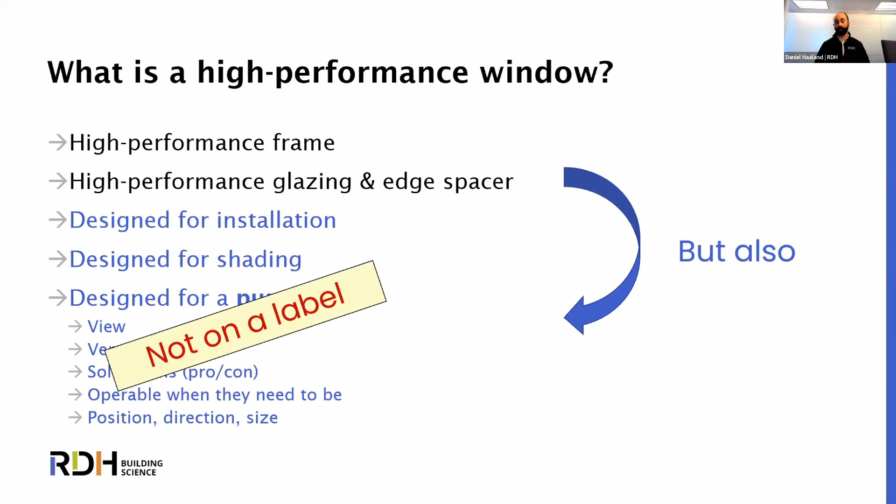So at the end of the day, a high performance window is a window that's been designed with and for a purpose. So it is not just high performance frame, glazing and edge spacer, but it is also designed for installation, shading, view, ventilation, solar gains, and so much more. And none of these extra things are on a label. So when you are evaluating your windows purely in the context of comparing option A versus option B, there is a lot about a high performance window that you are potentially missing, which leads us to Passive House.

There are some fundamental Passive House principles that go into what is known as a Passive House design. I think locally in markets where we all live in igloos, these are things which are becoming a lot more commonplace. So things like airtight enclosures, heat recovery ventilators, thermal bridge free design, high insulation values, these are all becoming more and more common.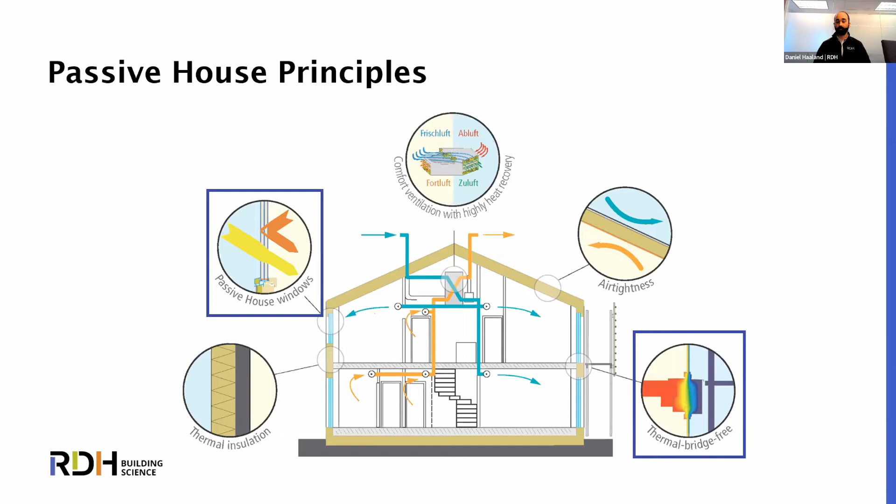But an important parameter, since the beginning of Passive House, has been design of windows and Passive House windows. The available market and the types of projects that are seeing this type of problem we're trying to design for windows goes from single family homes to mid-rise all the way to some of the tallest buildings that we have in our cities. So really it's not just a punched window problem.

The Passive House principles, designing for a purpose, designing for thermal bridge free design, is something which we are seeing across every size of project, from hospitals to fire stations to pools, etc. But we're talking about North America. So what does that mean? If we're looking at the market that we have in place, historically there's been relatively few North American products which are designed with the right inputs and data and performance values for Passive House projects.

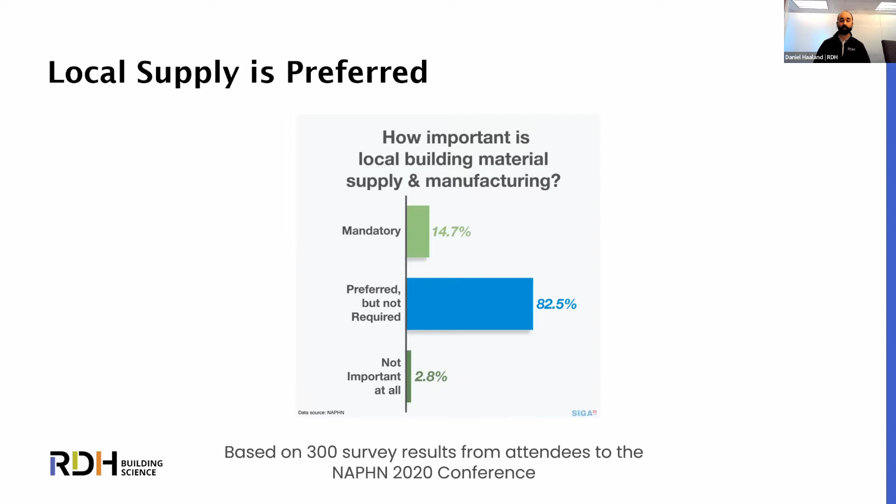Based on an earlier survey that was conducted by the Passive House Network, there's definitely a preference in North America to look for local options. So there is an opportunity for manufacturers to market their products here. But U value performance data is one of the major gaps.

How do we compare North American products which have had tested, reliable U values in the context of windows floating in space, but they've had tested and simulated data for many, many years? It's something which the industry is quite familiar with, has a lot of expertise, and in the scope of the program is done extremely accurately. And so we've got a whole bunch of different parameters. How do we navigate that?

This is really mostly for reference for people who look back at this slide, but fundamentally the difference in a Passive House designed window and a North American designed window does go down to some of those design standards that are referenced. So NFRC 100, for most people on the call, is probably a standard number that you've heard of and are familiar with. And the comparable standards are ISO 10077 and then a variety of others. It's a relatively minor point for this talk, but there are also some Passive House Institute specific rules that the reference procedure tries to cover as well.

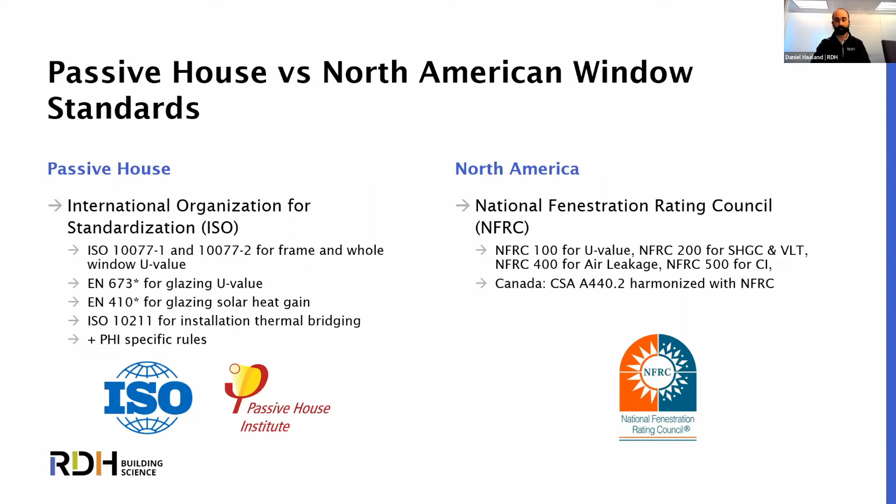So why does this matter? They're being simulated. Both standards have been used to predict energy loss through buildings. So why should I care? There are a couple of reasons. One is very fundamental: you just don't have the right inputs to put into the energy modeling tool, which is one problem that you could perhaps solve through simple math. But the different algorithms and rules also lead to different answers.

Here's one example that's relatively important in window performance, looking at center of glass U values. This shows two lines. The first line, in dark blue, is simulated U values according to the NFRC standard with a temperature close to 0 degrees Fahrenheit at different gap widths. And then the pink dashed line is according to the ISO standard, also simulated at a different temperature, which is 0 degrees Celsius or 32 degrees Fahrenheit.

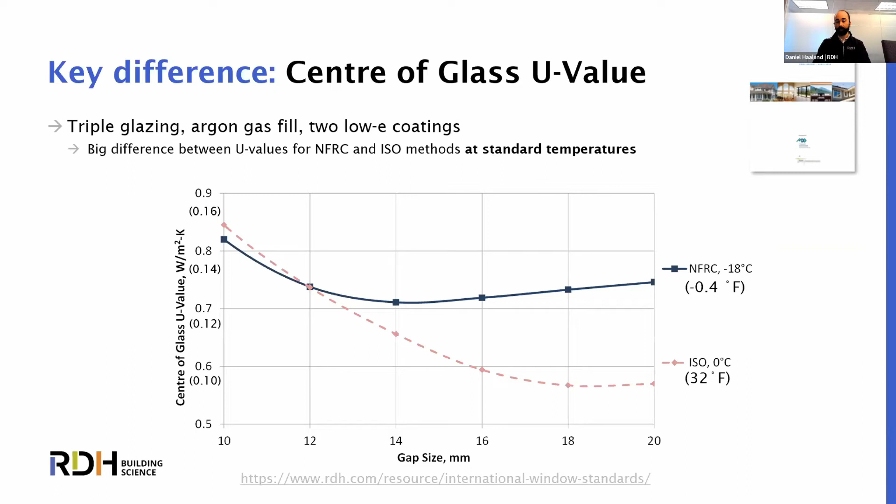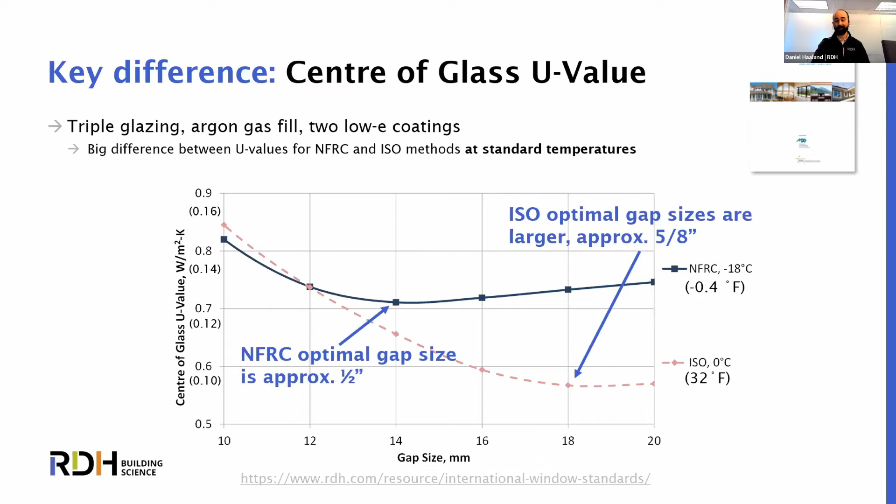What is relatively apparent is that if you were the manufacturer and you're designing to your local standard, well, what gap size are you going to use? In North America, that gap size is traditionally on the order of 1/2 inch. And in Europe, those gap sizes have tended to be larger, closer to 5/8 of an inch or in that magnitude. So when teams look at products designed in Europe for the Passive House standard or to the European standards, one very common and obvious difference is going to be the gap size in the IGU. And if you're looking at the difference in U value on the left there, that can be very, very significant in your overall product calculation.

It's applied no matter what the size is on that project, and that's all the design team has when they're evaluating that window product, unless they have access to a more detailed report or ask the simulator to run additional calculations. And it's somewhat of an industry dirty secret, but we all know that this is not the most accurate way of estimating annual energy use. It isn't. We all know this. And yet in North America, the assumption is, well, that's not really the purpose of this labeling, right? The NFRC approach is designed for a purpose, and that's comparisons. It's not, unfortunately, for estimating or modeling building energy use in a more accurate way.

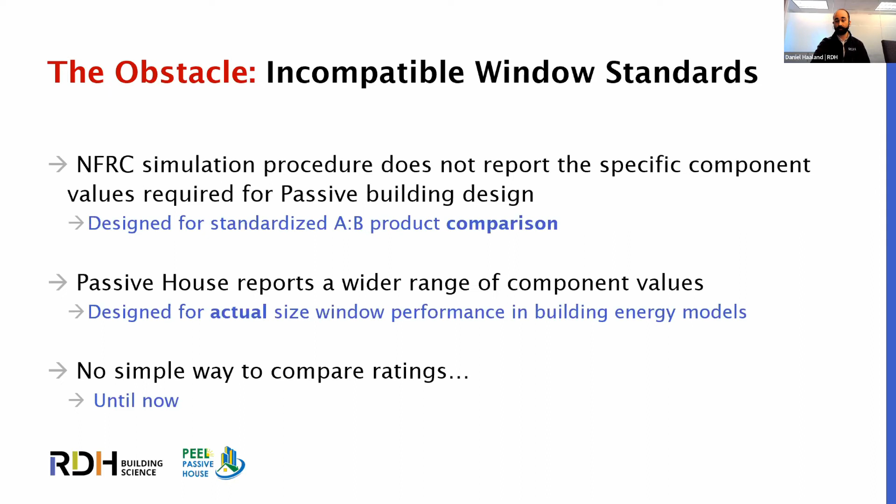And so there really hasn't been a way to do one versus the other using our tools in North America until now. This is where Peel Passive House and RDH came together to develop a THERM procedure that outlines all of the requirements for modeling a window using THERM to produce outputs compatible with the Passive House planning package. The full name is shown on the slide there. It's a bit of a mouthful, so I just call it the reference procedure. It is available for download freely at fenbc.org.

Link is below. It has example files and calculators, thanks to Peel Passive House, who developed those calculators. And the procedure document is very similar to the THERM manual for any simulators out there who are curious how they might get trained to do this. At the end of the day, the procedure is focused on allowing manufacturers or design teams to simulate products to the Passive House standard and allow for comparison to the NFRC approach. And so there's actually a template at the end that lets you present both data points side by side with their respective metrics.

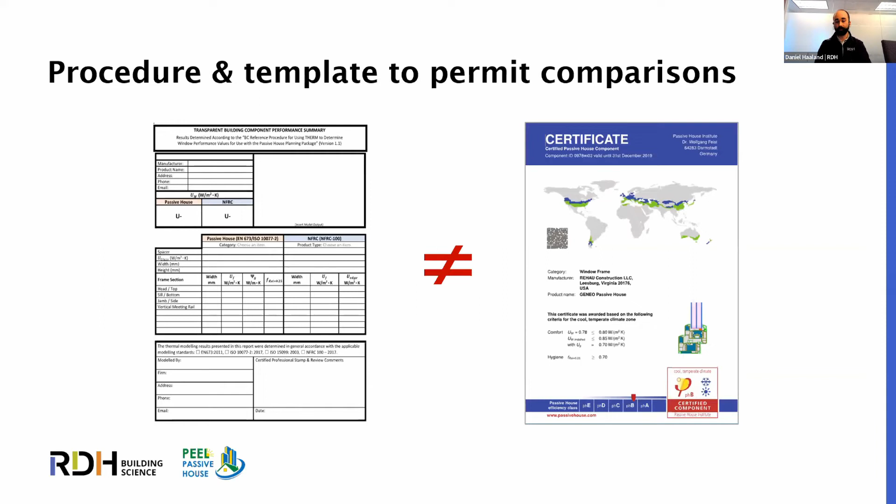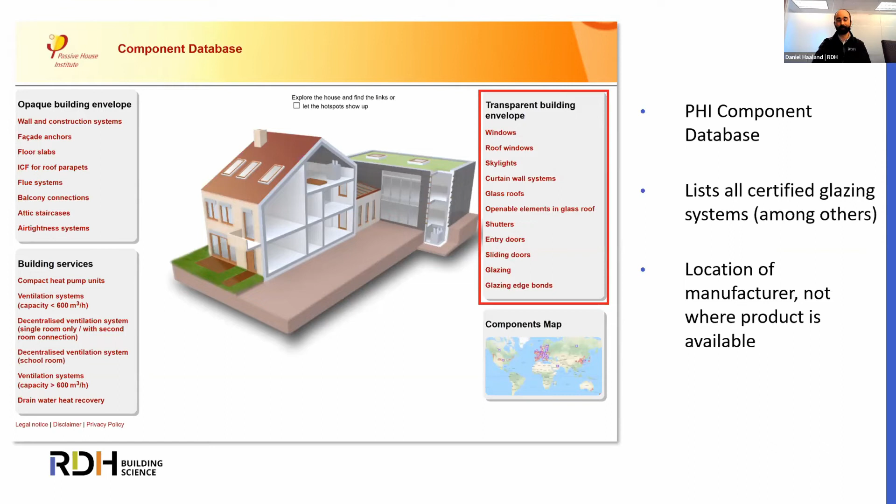But I need to stress as well that although the procedure has been recognized by the Passive House Institute, it is not the same as certification. So those are two different procedures. The reference procedure using THERM doesn't replace the certification program by the Passive House Institute and would not get your product listed in that component database if that's what you're looking for. Nevertheless, we've had quite a bit of success locally using this procedure, thanks to additional funding from our local governments here. So that leads us to our policy discussion later in the symposium. There are several really interesting success stories in our market due to this, not directly the procedure, but due to the incentives and policy strategies used here to provide design teams with local options for high-performing window products that are certified to the PHI standard. So there's a good news story there.

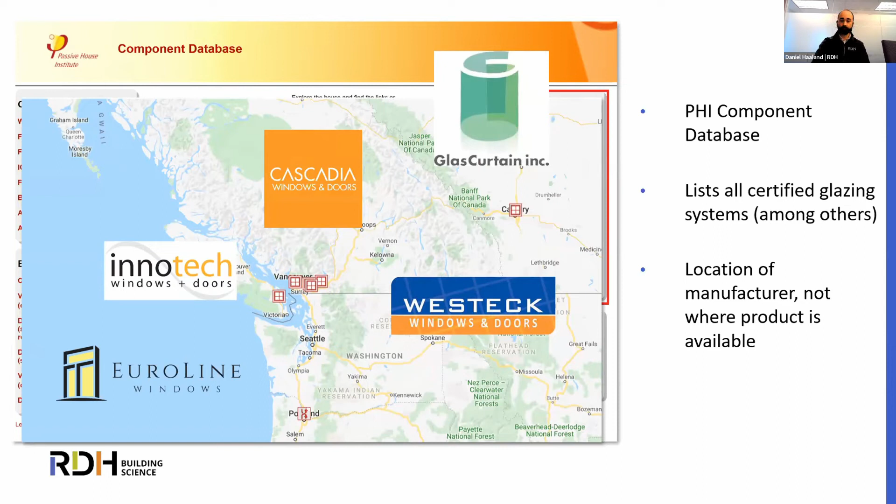And with that, I'll end. Thank you so very much, Daniel. That was really a fabulous synthesis of the two programs.

So what we're going to do now is flip to having a moderated discussion about the challenges that we presented and some of the conflicts and the disconnects between these two window certification protocols. We've heard a lot about the differences, but I think what is often left off the discussion is, what are the real core similarities that we can highlight, and where do we see some alignments? Because I think in that alignment is where we can potentially find some real movement forward.

So perhaps, Helen, I'm going to throw that question to you. Where do you see some real opportunities for these two protocols to move together to synthesize, maybe not merge and harmonize, which I think is becoming the popular phrase, and the initial attempt is to try and make these two things become one. Where do you think are some potential opportunities for each entity to use elements of the other protocol to enhance their own programs?